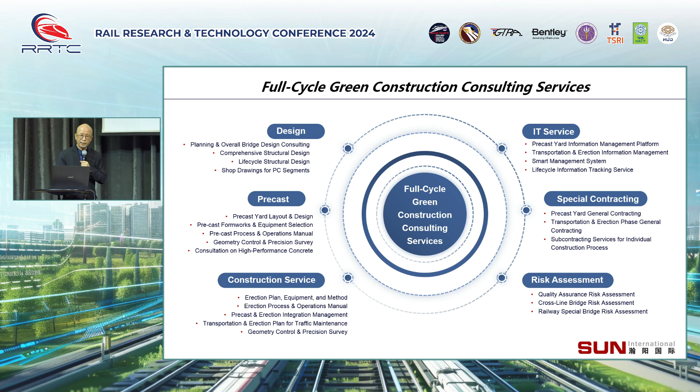Now that's what we do in terms of professional service to our client. I wouldn't want to repeat it - basically almost a life cycle without physically contracting. So today, I want to present you with a different way to think about your bridge. There is a better way for railway bridges.

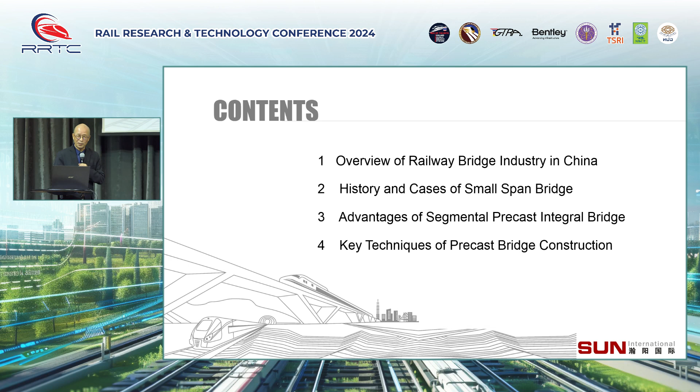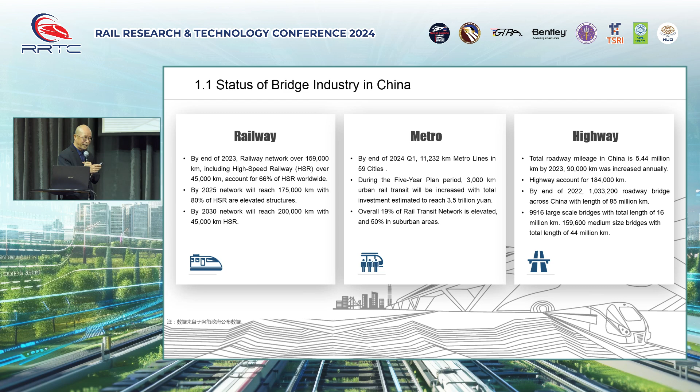So a little bit of overview about bridge engineering in China, and in a sense, probably in the world. I wouldn't want to go through the specific numbers, but I think if you do an integration for the past 20 years, in China they built bridges - the total number of bridges equal to the rest of the world combined. Even more, to be honest. So whatever they're doing pretty much reflects what's happening globally.

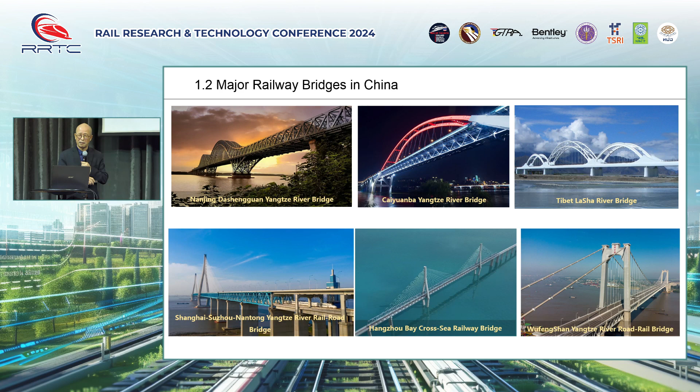Now, these are some of the bridges that I participated in, some as a designer, others as a consultant. They're all big ones - we did probably 500 bridges in 20 years, major bridges. But in the past 10 years, I started to concentrate on the main mid-short span bridges. Why? I found out as I went back to China, 80% of bridges, or even 90%, are short span.

The investment in short span bridges occupies - do you know how much for high-speed rail? 45% of the total investment. Think about it. But it was designed lousy. Let me tell you why.

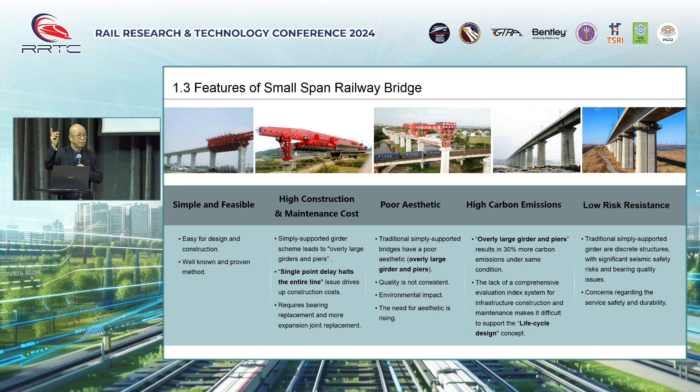All the big shot designers, so-called world-class designers, they care less about the 30-meter span bridge - you know, big institutions. They just copy the drawings from 30 years ago, 20 years ago. Copy, copy, copy. Amazing. But that's where you make a difference. So I decided to give up my signature bridge professional life and concentrate on mass short span bridges. I suggest our Thai railway colleagues should concentrate on your short mid-span bridges instead of one or two so-called star bridges. I'll give you a word that doesn't make a difference.

So a little bit of case study. You know, short span bridges on the railway started with a T girder, then box girder, then a little bit of continuous span cast in place. Why am I not in favor of cast-in-place, especially during massive construction periods? Because a good design can be delivered by a good contractor, but if you change contractors, with the same good design, you may run into trouble. It's called consistency. A precasting system will give you consistency, but you better have a good design.

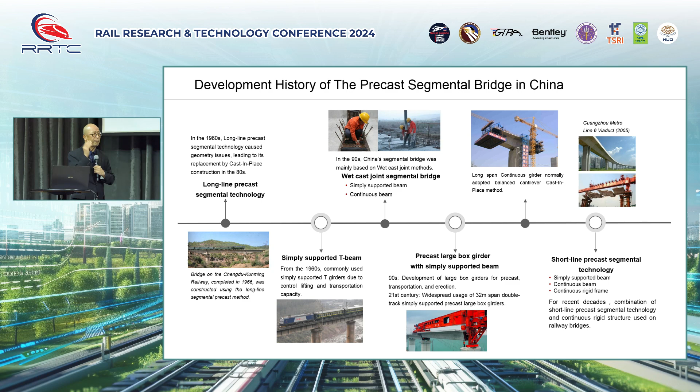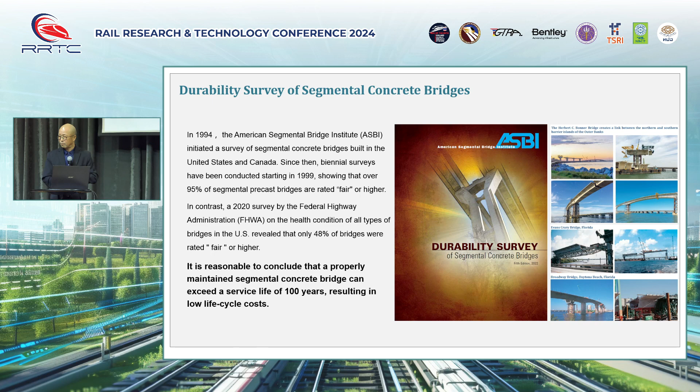Because if you don't have a good design, repetition leads to a massive amount of waste. Amazing waste, unbelievable. So precasting has durability and quality - its quality is better because it's all done in the shops. I worked in the U.S. for about 20 years and had been a member of their system.

Here's my Thai connection - that's 30 years ago. I started working for JMI. My first job was in Bangkok, for the Bang Na Bang Pli Bang Pakong job. That's when I had a connection with Jürgen. It's a really amazing thing.

But then it was designed with simple support, then connected later on. Why? At that time, we weren't that confident about continuous systems, because the geometry control for an integrated system is much more stringent. It's a lot easier for simple support.

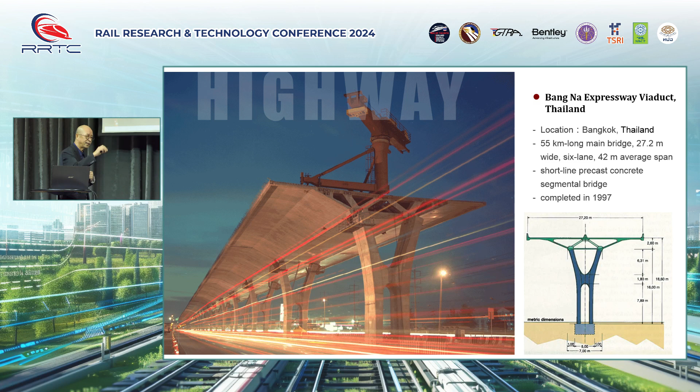I don't think a lot of people can do the integrated system with precast segmental because it requires more precise geometry control, not only in the casting yard but also on site, especially the pier segment. So that's that. Then this is the nice frame system, what I call the integrated system, in the new German high-speed rail. It's designed by my good friend Steffen Marx, who was the chief engineer for German high-speed rail.

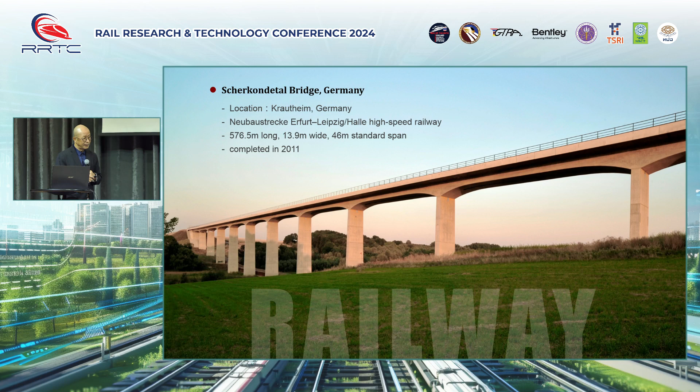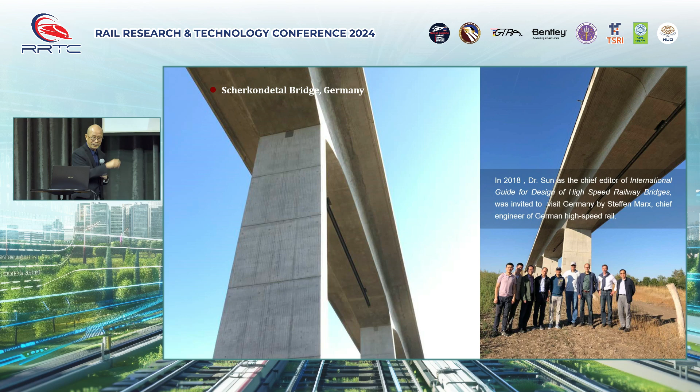He's now a professor in Bauhaus. Now, that's 46 meters cast in place. It's a beautiful thing. You know, I trust the German worker can do a good job, but if you're in China or in Thailand, the consistency in cast in place can always be a problem. It's a management issue. Now that's me, and that's Mr. Steffen Marx, also our Chinese colleague, all the high-speed rail design folks.

And they went further in the new German high-speed rail system. They not only have the longitudinal frame system, but it has the transverse frame because they want to save a little more concrete. That's something I a little bit disagreed with my good friend Steffen. Because transversely a frame system may save 3% of concrete, but it really slows down construction time and maybe increases the cost.

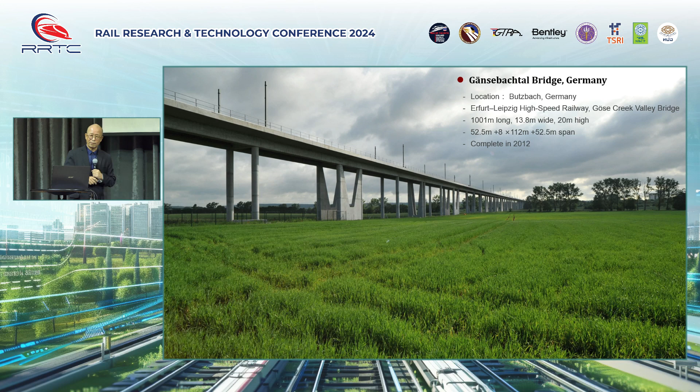So anyway, I'm on the board of the International High-Speed Rail Bridge Design Committee. We just published a report. I think you can buy it now, just published. It's labeled clearly: if you can get rid of bearings and expansion joints, do the best to do it. An integrated system is the most efficient system, a low carbon system.

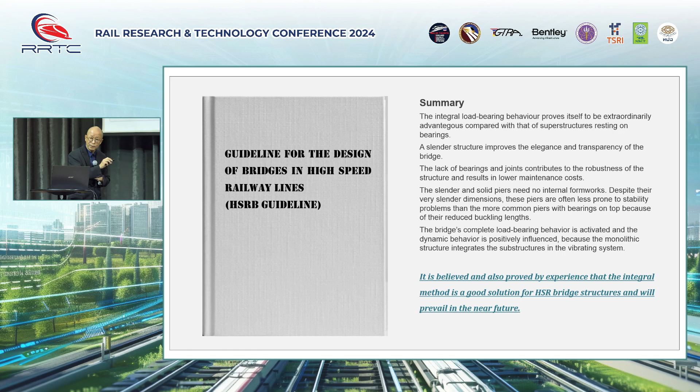I'll show you an even more beautiful system in precasting together. Now I'll tell you why they don't want to do it later, okay? Because they could not copy our big name design institution.

So this is some design in Hong Kong from about 15 years ago. It's a good design firm. They also, in a different way, found out an integrated system is much more efficient than a simple support system.

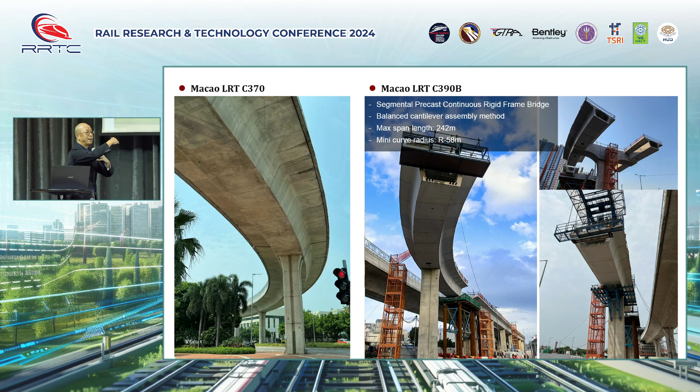Now that's in Macau. We did the geometry control on it because they were so afraid of a cantilever span out. What if you have geometry control issues? It's not right, they may go in a different direction when they come to closure.

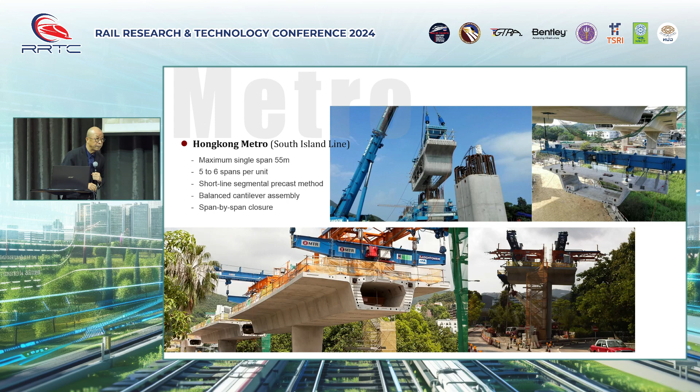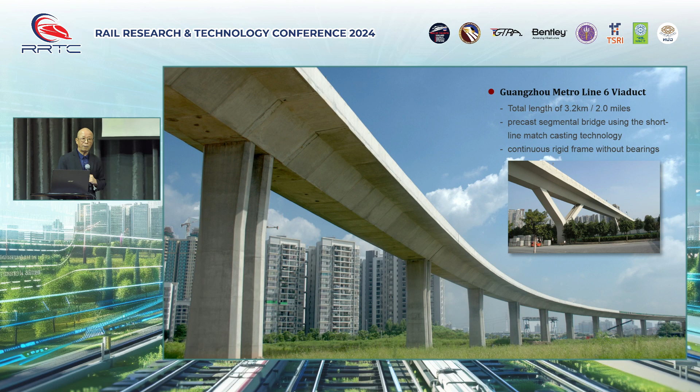Meaning you close the line, the operator has to give you a window to change the bearing. Why do they have to give you a window? Because once in operation, a 2 or 3 hour window is very expensive. They have to mobilize all kinds of operating resources to try to give you that 2 or 3 hour window. So,

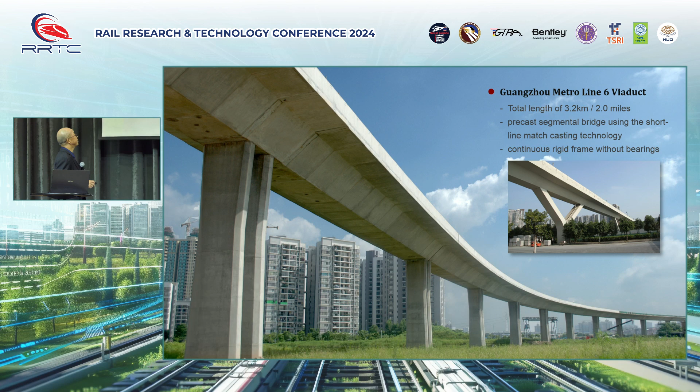now, this was designed about 10 years ago, in operation about 6 years ago, with a design speed of 160 kilometers per hour with a 6-car train, double lane.

Now, instead of a twin pier, we put it into one pier, a thin pier, and saved 50% on the substructure. I mean,

all organizations try to, we were joking with Jürgen, they try to have us not cook because you may have carbon dioxide, you may have dioxide. But boy, the biggest emitters are us. Concrete and steel, number one. No other thing can even come close.

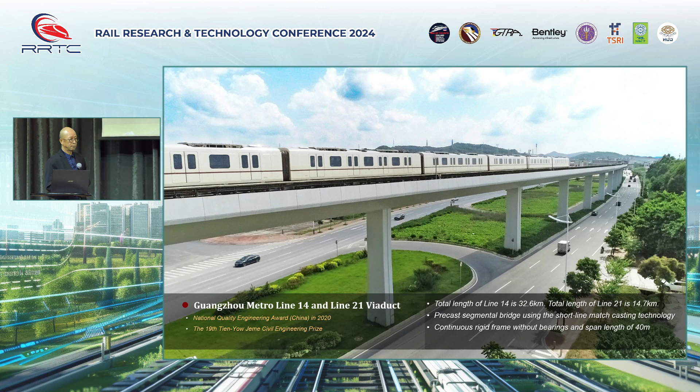Now, what's nice about these things is you can build with light equipment, with segmental, instead of building with heavy equipment, like 2,000 metric tons of equipment. If a pier, whatever situation you have, for example ground piping, or even a little bit of argument, if you stop at one point, then the whole construction line gets stopped. That is not what you want in a complex system engineering project.

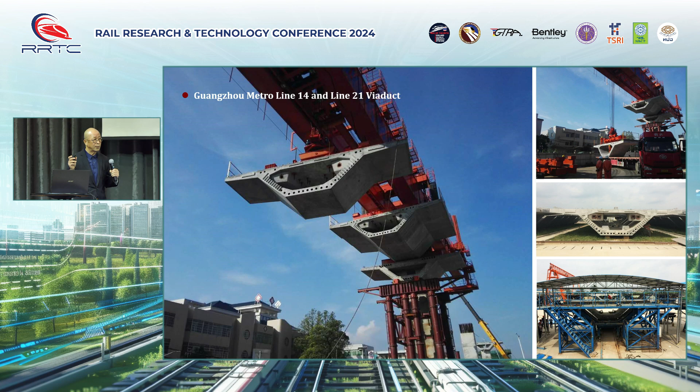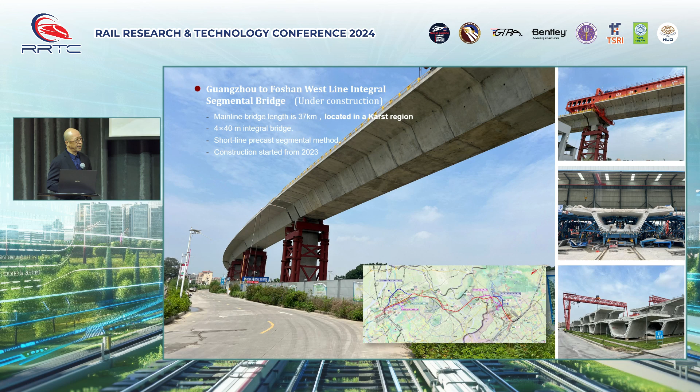So this is for the little bit heavy rail, 200 kilometers per hour train. We also test this out. I think it's close to finishing by the end of this year in Guangzhou. Now we propose a new proposal to the high-speed rail. Look, this 350 kilometers per hour high-speed rail with this system.

The substructure saving in concrete is 60%. Do you know, if you come close to a simple support system with the high-speed rail, like 350 kilometers per hour, each pier looks like a monument. It's amazing. The foundation is massive. The footprint is unbelievable. 60% saved in concrete. Not cost, in concrete volume.

Cost-wise, the superstructure volume, we can probably save 5%. Superstructure, not that much of a difference. Then the bottom 60%. So you can have an overall cost saving of 10 to 15%. That's without saying there's a 15% cost saving in the operation life cycle. You're talking about an overall 30% difference. If you want to spend $10 billion, you can save $3 billion.

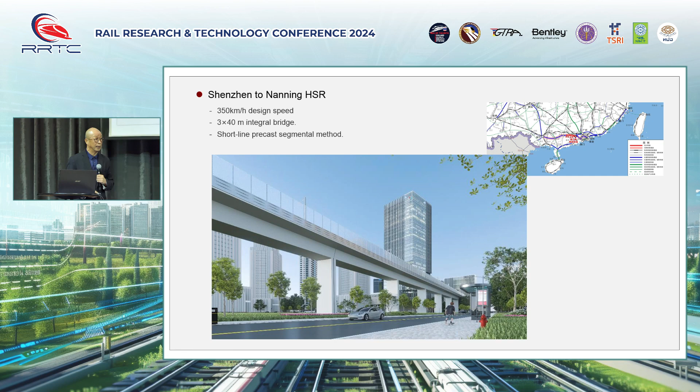Another thing I want to show you, this is even more sad. Whenever there's a geometry crossing the road or a little bit of obstacle, they used to use portals. All kinds of portals. Like this one, they're going to use 8 portals. The mayor of Shenzhen came to me and said, Dr. Sun, can you please get rid of the portals? Otherwise, my citizens will put this entire line underground, or get rid of this line. Put underground, 10 times difference.

People asked me, why 10 times? The boring is only 3 times. Well, look at the station. The underground station and the above-ground station, the cost differential could be 20 times if you integrate the life cycle. I don't know if you know the secret. The underground station's electricity consumption, same capacity, is 10 times more than above ground. Think about it. The construction cost is 10 times on the station.

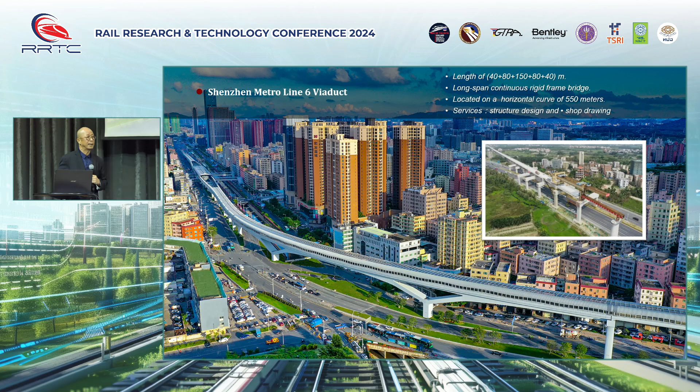By the way, this is not a rendering. That's a photograph. Once we did that, our local people, after their wedding party, took a photo underneath the bridge. That's a little park now, instead of an ugly number of big portals.

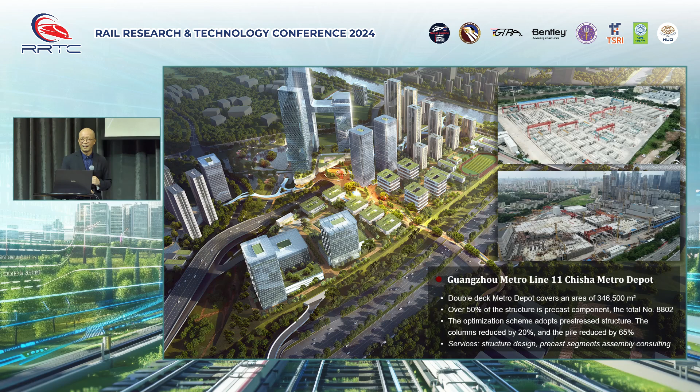We also do precasting systems for underground engineering. You know why? I realized lots of underground engineering does not use pre-stressing. Without pre-stressing, you cannot do precasting. How do you connect? So they have huge, heavy retaining walls, like 1.2 meters thick, some of them 1.5 meters thick. This is unbelievable. We dropped the volume by half by doing precast. They say, what about water? I deal with water all the time with pre-stressing. So they don't know. It's crazy.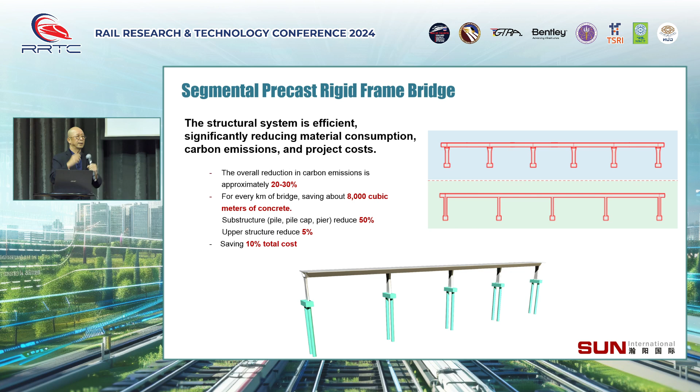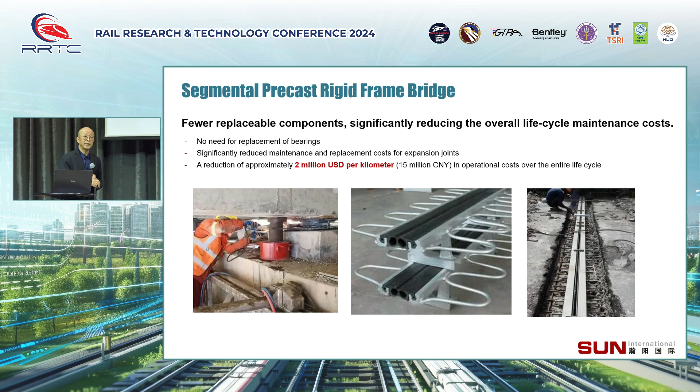So anyway, in Southeast Asia, especially in Thailand, we know precasting, so I don't have to repeat it. But it's only precasting plus the integrated system. If you just have precasting, it's clean during construction, but you don't have efficiency. You still have huge carbon consumption and cost much more. By the way, $2 million per kilometer of bridge life cycle cost, just to maintain the bolts and nuts. Can you believe it? So that's a comparison.

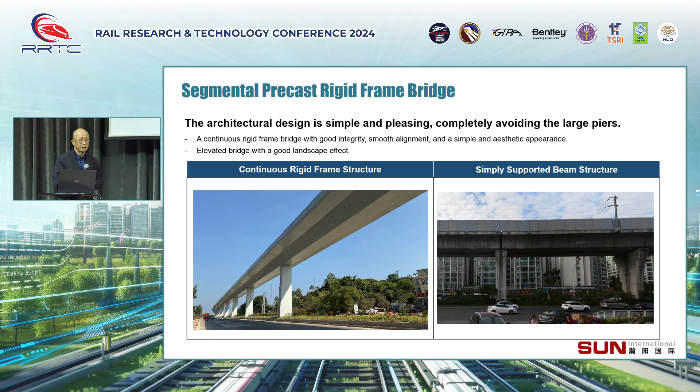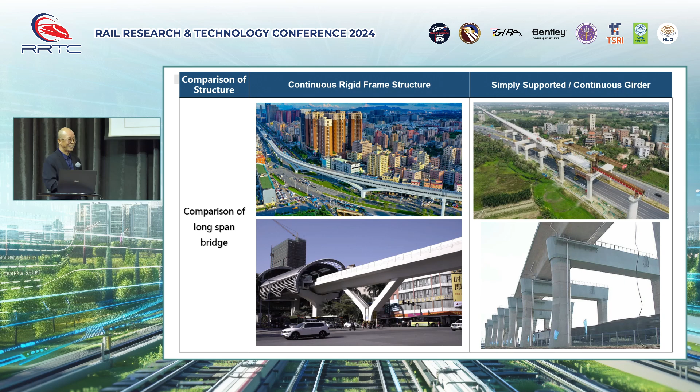That thing looks like something ancient. That's what we're using now. For the people of Thailand, we started high-speed rail a little late, but that's an advantage because you have a better solution. We don't have to copy 30 or 50 year old technology. No. And it's safer. You can get rid of all these portals. I came here the past few days and indeed saw a lot of portals.

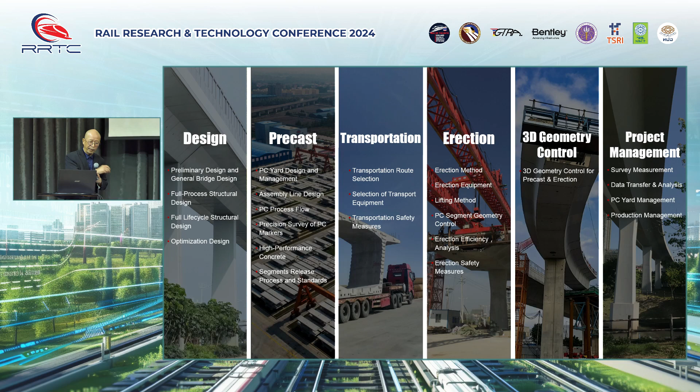We provide construction engineering service, not just design, but also the precasting yard and erection, the complete cycle if you need. More importantly, we provide digital service to make sure you get error-free precasting. Because you use people, and the most responsible people can make a mistake. You need a digital service on an industrialized approach.

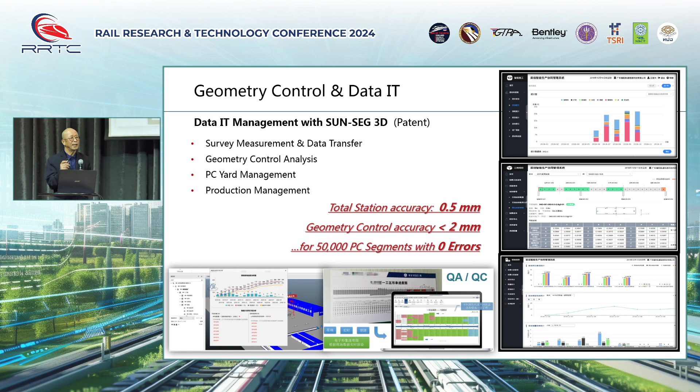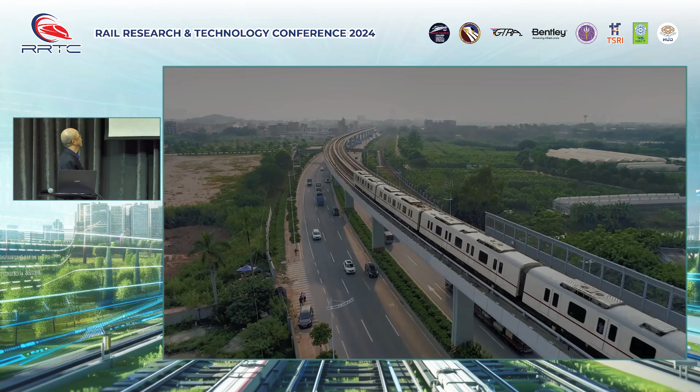So it can be done, it can be a beautiful bridge, save money, save your construction cost, also your maintenance cost. All right. Thank you.